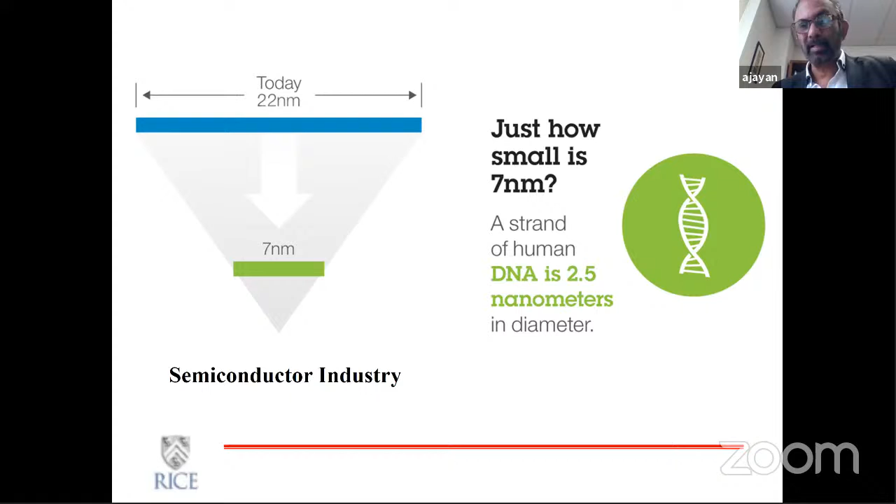That gold, which is yellow in bulk, changes colors as you go to smaller and smaller scale. So by breaking down salts which contain metals using chemicals, people were able to make nanoparticles that are really small, so that you actually get different colors, which is a result of the plasmons that exist in these materials, or electrons. And that really shows that people have been processing and doing nanotechnology for a very long time, although not really understanding how these things come about.

And scientists like us are in the process of understanding some of these things and going beyond what they could do to be able to control things at that scale. Well, before I start giving examples and so on, I still want to say a few things in background. A couple of things that are very important, especially in terms of processing and manufacturing. And this has to do with how we create material at that scale.

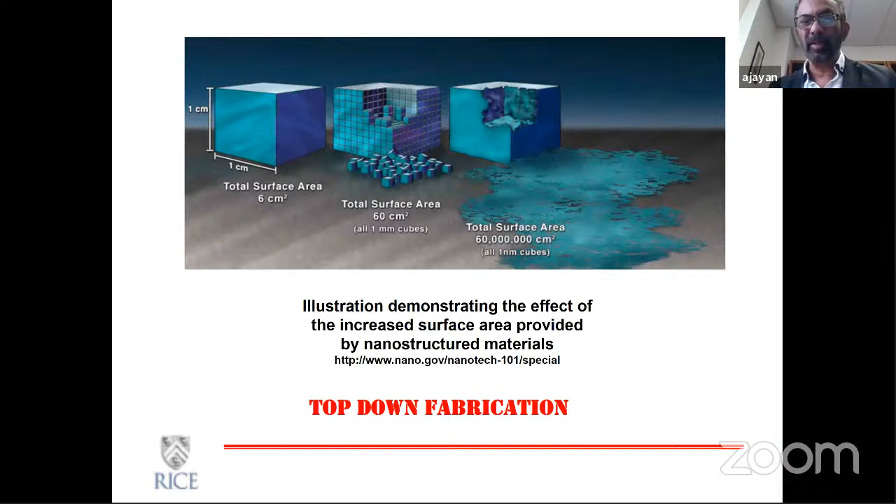Then there is the other approach, which is essentially bottom-up fabrication, which biological systems have always been part of, where you build stuff from molecules up or atoms up, and how much control you can have is a matter of what kind of tools or approaches you take doing this bottom-up manufacturing.

How do you build structures and materials with atomic precision? And how do we assemble these things together? How do you build these pathways from nanoscale to macro scale so that you can have control at every stage? These present two diverse ways of putting things together, the top-down approach and the bottom-up approach, and both are valuable. Of course, in the case of bottom-up fabrication, we are still learning the rules of the game, and hopefully there will be a stage when we will be able to build things with atomic precision.

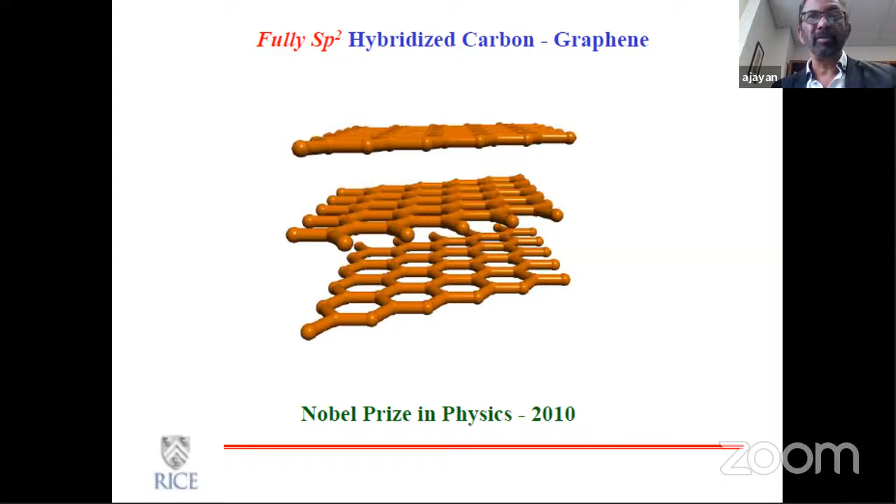And again, there are some amazing physical attributes and physics properties for these graphene-like materials, extremely high mobility for electrons in these systems, and there are many other things that are probably more detailed. But the fact that you were able to create a freestanding two-dimensional structure, just a single atom thick, and explore the properties of this was a remarkable thing. I will talk about this later on, related materials that we do.

And somewhere in between the 2-dimensional and 0-dimensional structures that I showed you, for the same carbon again, people also discovered what is called carbon nanotube. And essentially, these were just a layer of graphene that was folded into a beautiful cylinder. But the discovery was interesting because what people figured out is that by a slight twist during this folding process, one could introduce a structural chirality, or how the hexagonal arrays go around the cylinder. And this chirality had a strong effect on the electronic properties of this material.

And this was very much a surprise at that point in the early 90s, because for the first time, something like carbon, which was either an insulator, for example, in diamond, or a semi-metal in the case of a graphite material, these type of structures essentially proved that you could have semiconducting carbon. You could have metallic, highly metallic carbons and so on. So again, there are two attributes that came together. One, of course, is the structural changes that you can build into a material. And the other is the dimension.

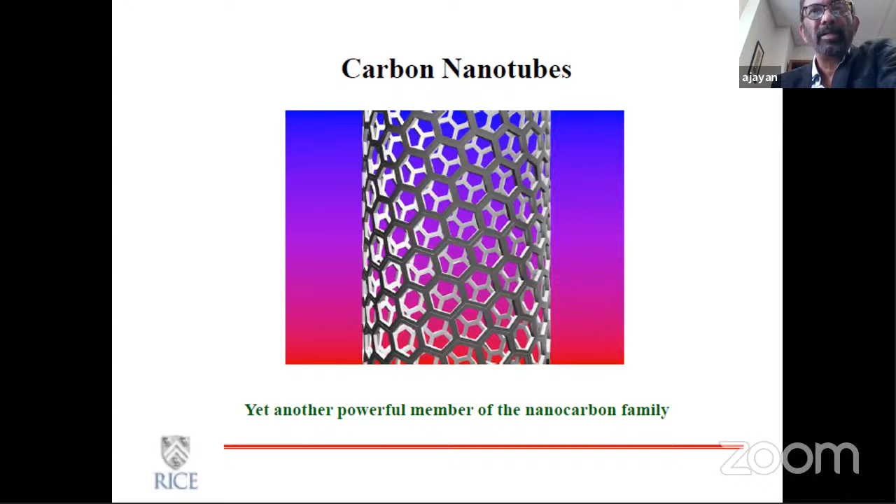So a combination of this dimensional aspect and the structural aspect allows you to make lots of materials that go beyond their traditional bulk properties. And that is why this kind of materials become so interesting. Again, as a material scientist, this is what we do. We explore properties of materials, but we also try to build new materials that have unique properties and that could be adapted to emerging technologies.

Now, carbon nanotubes are fascinating for a lot of people. And there were all kinds of fascinating ideas that were proposed. And this was one. Richard Smalley, who was a Nobel Prize winner from Rice, used to say things like, I would like to make a very long fiber with nanotubes because nanotubes are extremely strong, and go fishing with it. Or, there were people who were suggesting that you could, in fact, build a space elevator using something like nanotubes. For a good reason, because carbon-carbon bonds are extremely strong, and this is probably the only material that is viable for something as beautiful as a space elevator.

But the point I wanted to make is that there is a major challenge as you go from the fundamental properties of materials at nanoscale and how they scale as you build larger and larger structures. Typically nanotubes are a few nanometers in diameter and several hundreds of microns long, but that's not good enough for making a space elevator. You need to have miles and miles long these type of fibers. And in order to do that, you need millions and billions and trillions of nanotubes to put together into these macroscopic entities. And then the problem arises.

Then you lose properties along the way. So interface becomes a deciding factor in many of these things. And I will talk later on about these specific interfaces that are important. How do you conserve the properties as you scale or as you build things together? How do you assemble these things together?

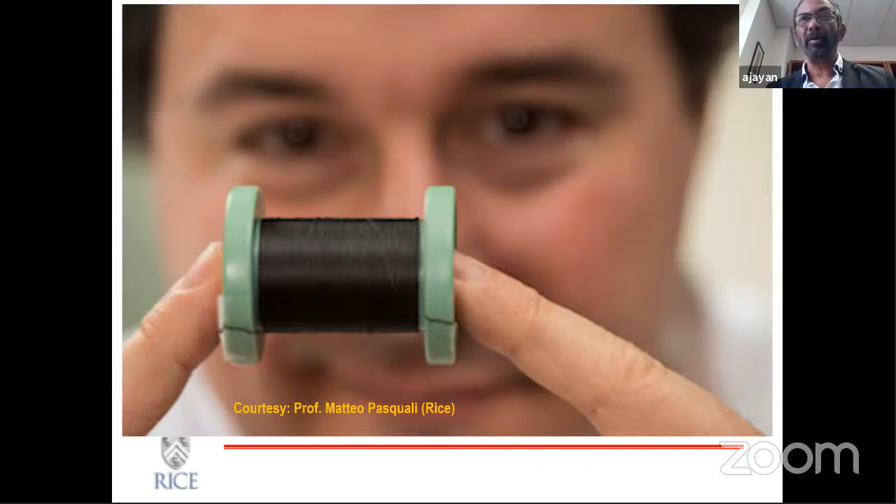Essentially, these calcium carbonate platelets in the submicron scale or nanoscale have been sandwiched between protein molecules or soft material to make this brick and mortar kind of arrangement, which makes it extremely tough. Essentially, the idea is that because there are so many of these interfaces, if you create a crack, the crack gets deflected at every one of these interfaces, and ultimately it takes an enormous amount of energy to break this. And that makes it a super tough material.

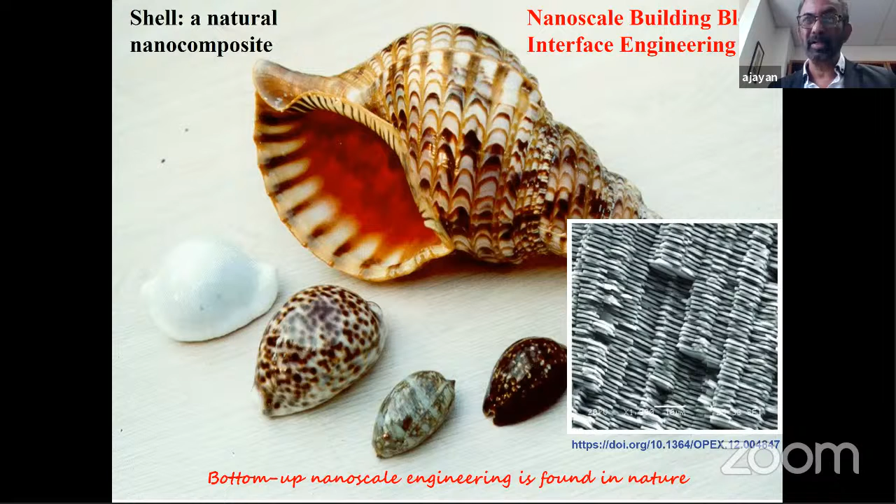So the same material that is very brittle, as in chalk, can be made into something like this with a small amount of additive and the right kind of engineering, especially at the nanoscale. So that again shows the beauty of nano engineering in all its glory. There is another thing that also plays well to nano engineering, and that's also found in nature, and that's hierarchy. When you build things from bottom up, it's much easier to introduce hierarchy.

So something like a plant, or the body of biological systems, you start with really small fibers made from glucose and other types of molecules, and you start creating these nanoscale fibers, and then to micron scale and to larger scale. So at every stage of this structural variation, you can introduce functionalities, you can introduce surface changes, which means that this hierarchy plays in very well into the overall structure that you create.

And this is only possible, or at least it's much easier to do, when you do this bottom-up fabrication compared to the top-down. And that also is the reason why the bottom-up approach is very, very valuable, because you have lots more flexibility in creating interfaces and modifying interfaces as you build these.

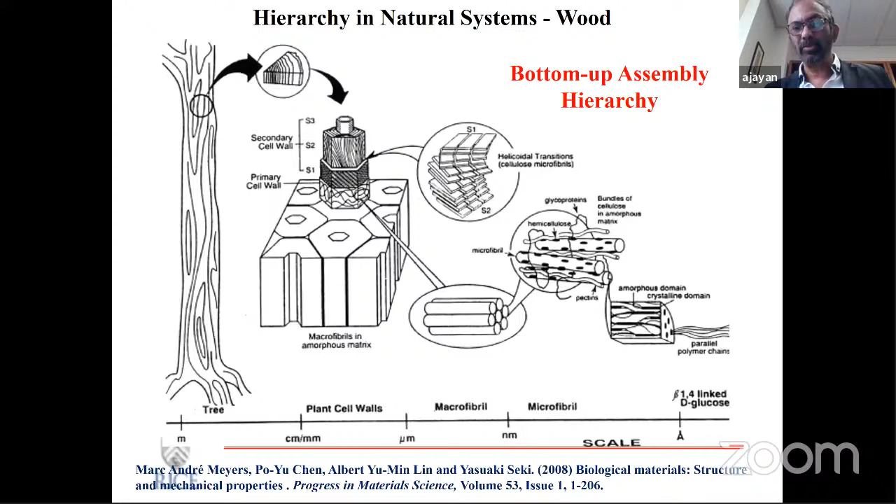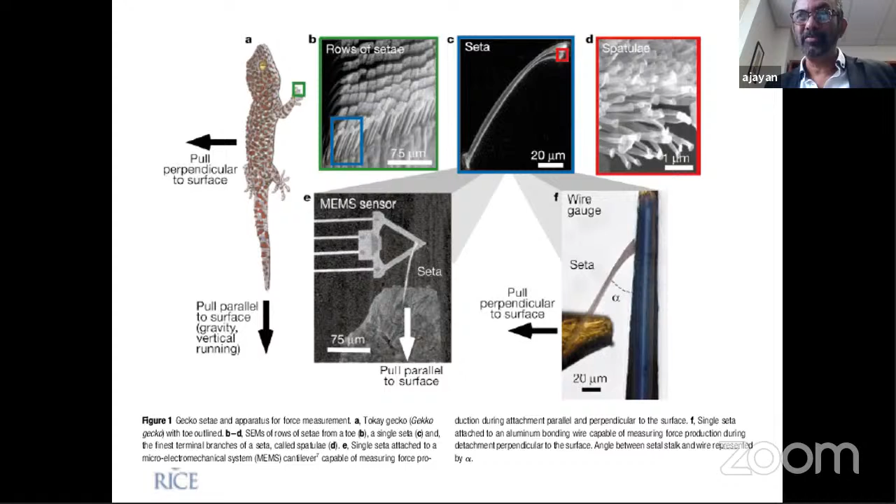So when they place their feet against the wall, there is an enormous amount of contact area because of this nanoscale size of the fibers, and that van der Waals force is enough to make them hold their own weight. And also it's nice because since it is not an irreversible sticky business, you can actually quickly change the orientation and change the contact forces so that it can actually move again. So it's a marvel of nature that it has evolved to do things like this by using nanotechnology as a tool.

So I think I have given you several examples why nanotechnology is exciting, both from the point of view of what is existing in nature and what can be done in terms of some of the applications. But let me come a little bit closer to the kind of things that we do in our lab. We make nanostructures, we assemble them in order to create certain structures. And what are the challenges and opportunities in this? So one of the major points here is, how do you assemble this humongous number of nanostructures to make something useful, or to at least create well-defined structures.

It's a little bit like playing this Lego game. And many of us have already done this, and you know, the smaller the pieces are, the more complicated it gets, right? But of course, the smaller the pieces are, the more flexible you are. So nanotechnology is, again, basically a Lego game, but with pieces that you cannot really see.

So you need to either use a magnifying glass in the sense of a large microscope, or you need to figure out some boundary conditions that would allow things to assemble by themselves. We call it self-assembly, or sometimes directed assembly. So you create environments where these structures or these pieces can assemble without you having to put them one by one. So that's the tricky part.

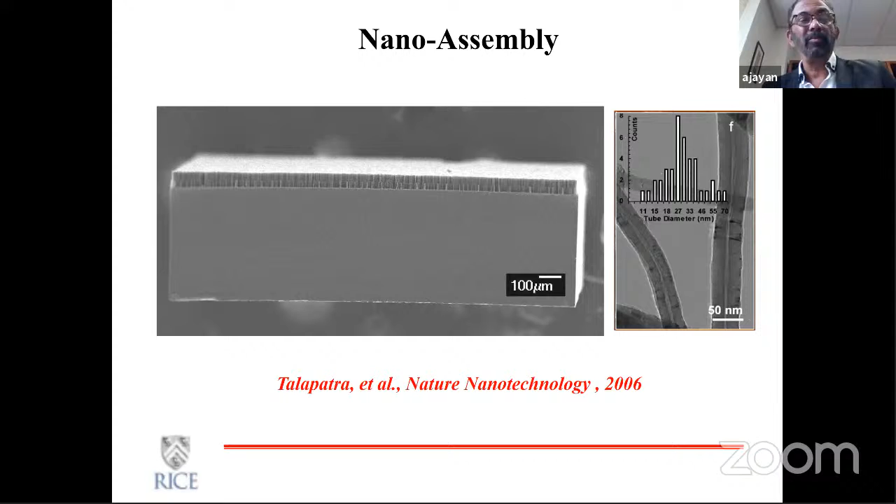And here is an example where many years ago, we were able to assemble carbon nanotubes in these vertically aligned arrays, a large number of them, by essentially preparing a substrate with the right kind of catalyst and using it to deposit the nanotubes. Of course, these are not as perfectly aligned as one would like, but there is a significant amount of alignment that allows you to call it vertically aligned. And what could one do with something like this?

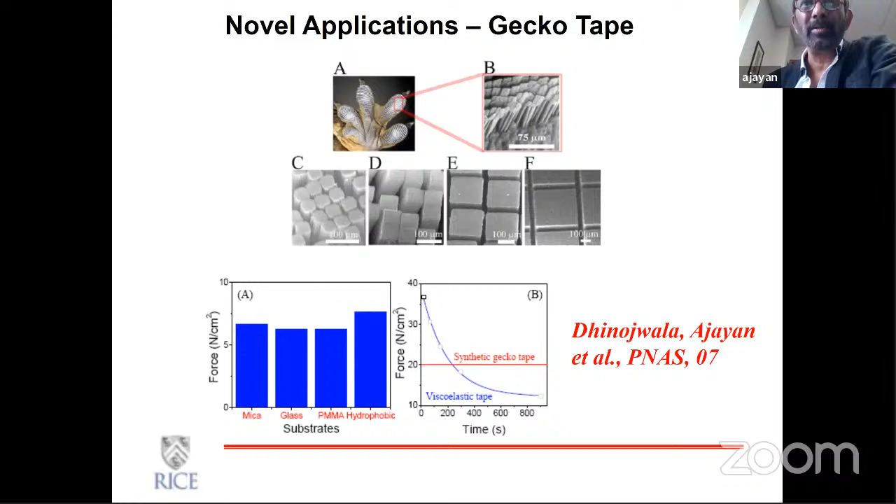So again, coming back to this gecko, we were able to create, using these aligned nanotube structures, strongly adhesive surfaces. In fact, artificial gecko surfaces. And we were able to show that, by engineering the right density of these nanotubes and the right patterns that you can create by post-processing or post-growth, we could mimic the gecko and build very interesting artificial adhesive tapes. So that's an interesting example of why one would want to engineer nanostructures in a particular order.

Here is another. We were also able to show that, again by engineering the density of these nanotubes, we could create a surface that has an enormous amount of light absorption. In fact, we were in the Guinness Book of World Records for showing that a layer of nanotubes would absorb more light than any other structure that has ever been made.

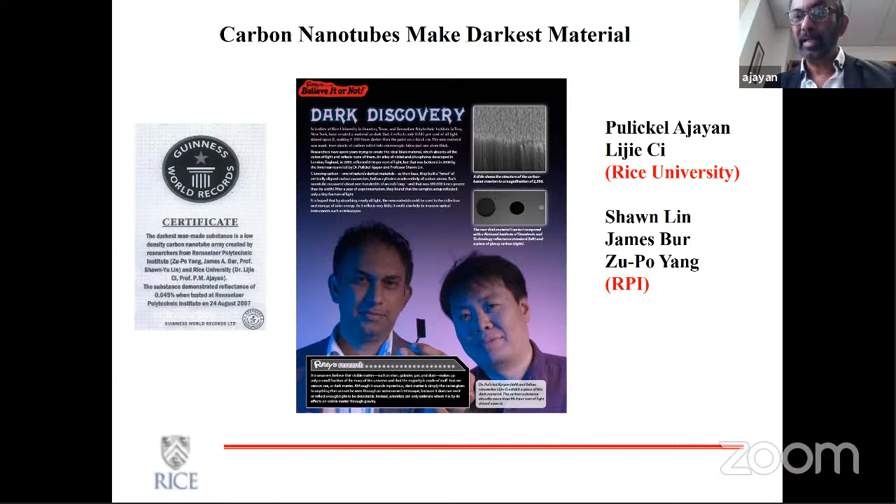So again, you can see we were also in things like Believe It or Not, which helps young people to be attracted to science. We could, in fact, by designing nanomaterials, build these types of interesting structures that have both practical value and excitement value, motivational value. But if you go further and think about creating all these structures in three dimensions using the nanoscale as the building block, then you start to see what kind of challenges you face.

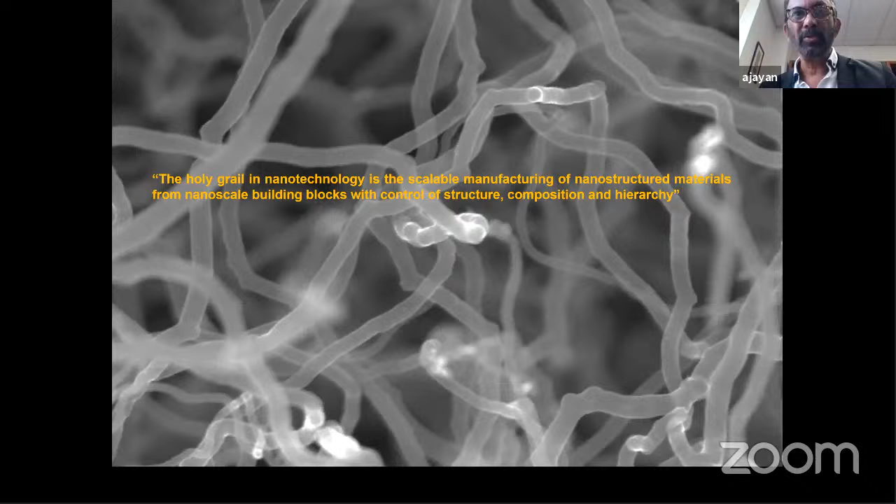In fact, I think the holy grail in nanotechnology is the scalable manufacturing of nanomaterials from building blocks that are nanoscale, with control of structure, composition, and hierarchy. And even though we can say that this can be done bottom up, there is no real scalable way to make this happen. For example, instead of the simply aligned van der Waals kind of structures that I showed you before, we want to build something like this at the nanoscale. Can you actually do this? The answer right now is no.

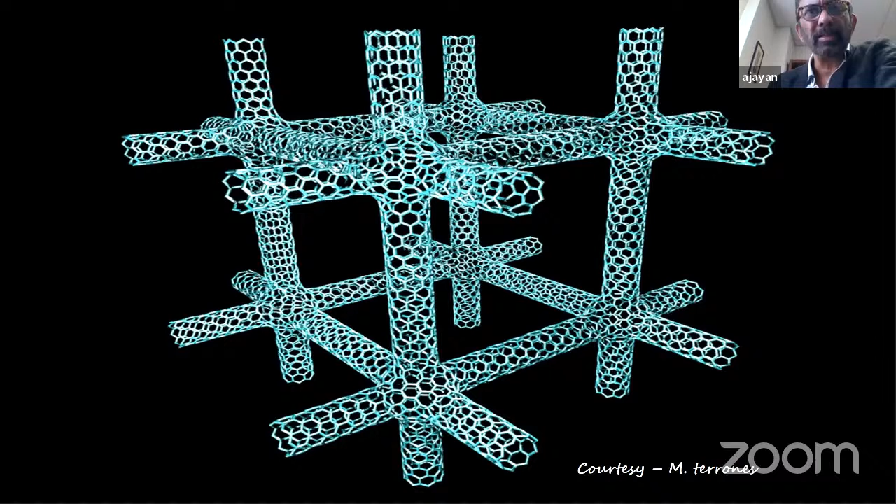First of all, making junctions between nanotubes is really a problem, because you have to break bonds and build bonds again. And secondly, how do you really make these types of architectures with periodicity at the nanoscale? There isn't any such method today.

And if you are able to do this, here is a theoretical prediction of certain types of carbon-based structures that would look very different, and would also be enormously useful. We talked quite a bit about carbon in different modalities, but if you could build these types of purely carbon architectures, you can make carbon that is magnetic, carbon that is extremely conducting, carbon that is insulating, in some sense.

So I think the question is really, it's already known from theory that certain types of structures would give you certain properties, but today's technology doesn't really allow you to make these structures at the scale. And again, dimensions are important. You can make these at a larger scale, and I'll show you one example of that. But to make this at the scale and with the structure that you require is still a major challenge. But this is where the future is going.

How do we make these types of architectures? Now, as I said, at a larger scale, we can easily do this.

The same structure, if you are not worried about the scale, we can print these. 3D printing or additive manufacturing has become very popular today. And we have been able to print all those geometries that you saw in the previous slide with different materials. And of course, these structures are also interesting in terms of stress transfer, or gas transport and so on. But of course, it is still not at that scale where the fundamental properties will change.

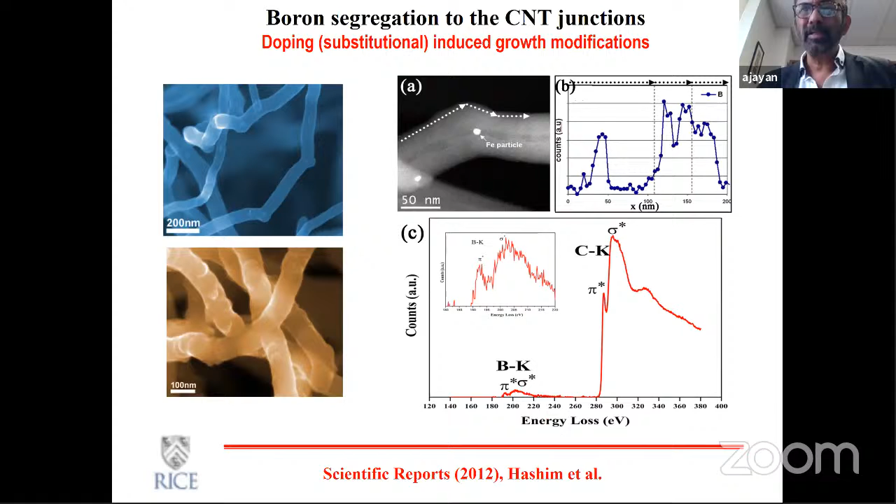People have done work in order to make these 3-dimensional interconnected architectures, but not with the periodicity that you saw. So by using certain catalytic techniques, you can actually weld 2 nanotubes together, you can create junctions, and you can create 3-dimensional structures. For example, this sheet of carbon that we made in our lab is all interconnected nanotubes, but with no periodicity, because that is difficult to control.

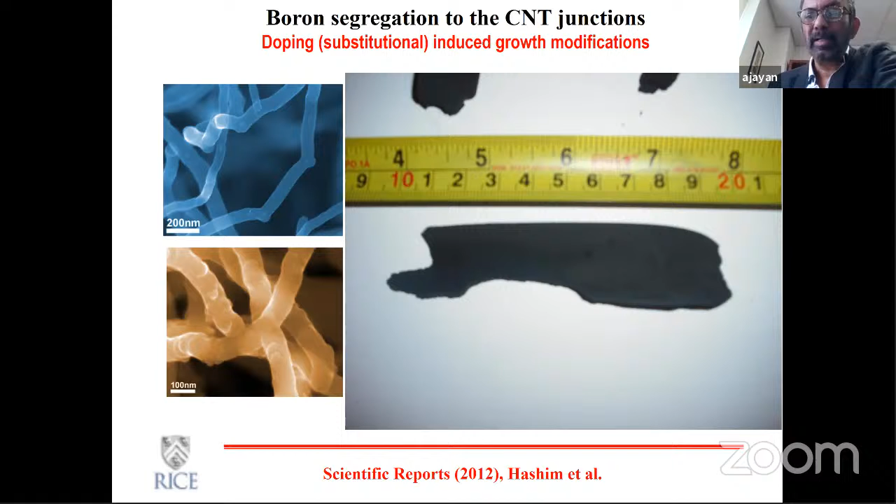And these are, again, very porous membranes that are very strong because they're interconnected nanotubes. They're used, for example, as electrodes in energy storage, batteries. You can use them for membranes, for filtration. So I think there is a lot of activity today in trying to create nano-structured materials or nano-engineered materials, which could be useful. But again, in order to reach the kind of clear periodicity and control of structure, that is still quite a challenge.

Of course, we also do a lot of work at the very nanoscale. It's one thing to make a large solid structure with a lot of interconnections, because it's hard to say how these materials would behave. So one has to go and look at these individual junctions using techniques that people have developed in their labs. For example, you can look at a nanoscale junction in situ in a microscope and look at the structure as well as the change of behavior. When you load it, how does it change? You can actually create a stress strain curve within that junction.

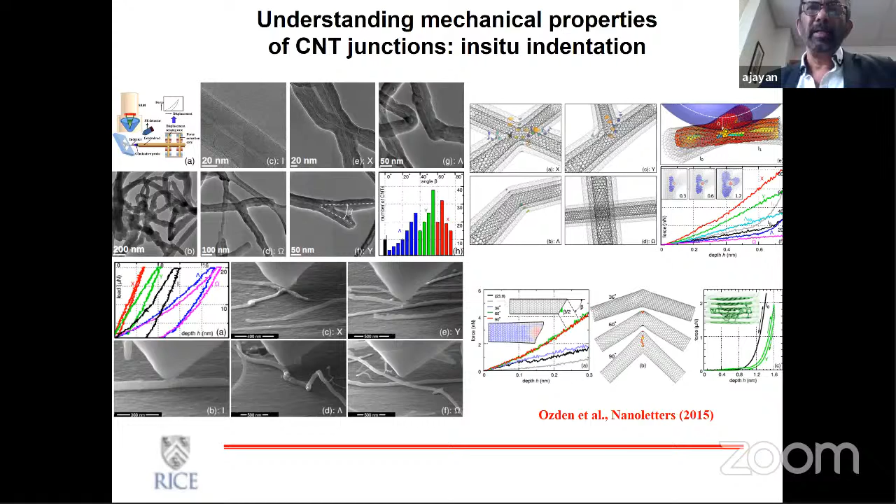So there's a lot of work being done in developing tools that allow you to do nanoscale observation or experiments at the nanoscale. And that is as important as the things that we do in terms of creating materials. And once you have some understanding, you can use the theoretical predictions to broadly predict how these kinds of materials will behave. And it's important because you need that data.

And today, theory has broadened into other areas like artificial intelligence, machine learning. So all these things come into play when we are trying to understand a complex structure and look at nanoscale properties and how that translates into macro scale properties. Here is an example, a very similar structure, a three-dimensional scaffold made from interconnected graphene instead of nanotubes. And I just wanted to show this because it shows an enormous amount of flexibility.

Not only that, this elastic nature of this kind of structure holds all the way from cryogenic temperatures close to liquid helium temperatures. Actually, that's remarkable, something showing elasticity at that temperature, all the way to 1,000 degrees or so. So if you can engineer structures with nanoscale elements, which have specific, fascinating properties, and build larger structures which could be useful in practical applications, then you can extract these significantly improved properties.

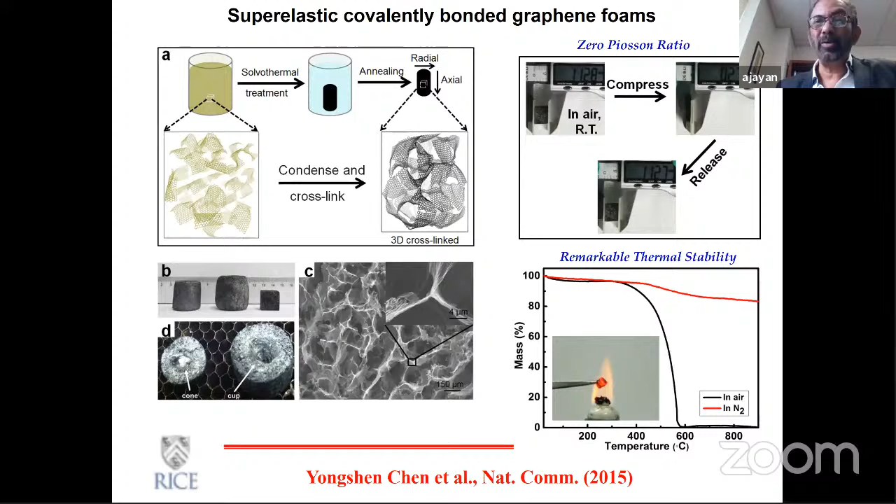I don't think there's any material that shows this kind of thermoelasticity range. So that, again, shows how we work from the nanoscale and go all the way to making structures.

Let me talk a little bit about interfaces. I don't have too much time, so I will go quickly on some of these ideas. One of the things that you saw in an early slide is that as you break it down to smaller and smaller pieces, the volume of the interface increases dramatically. And that is a plus, and that could also be a minus. It could be challenging because sometimes processing becomes very difficult. The same amount of material, if it is in the micro scale, you can easily disperse it in a matrix, but when it is in the nanoscale, it becomes enormously difficult because of the large surface area and hence increase in viscosity.

So interfaces are important, right? Interfaces can also be an advantage because, as I said, you can build hierarchy in a much better way. You create surface functionalities, you can modify surfaces at every level. And as you have more and more interfaces, you can introduce the value added by these interfaces. Just like the abalone shell that I showed you. It is only the interfaces that are allowing you to make a material that is much tougher.

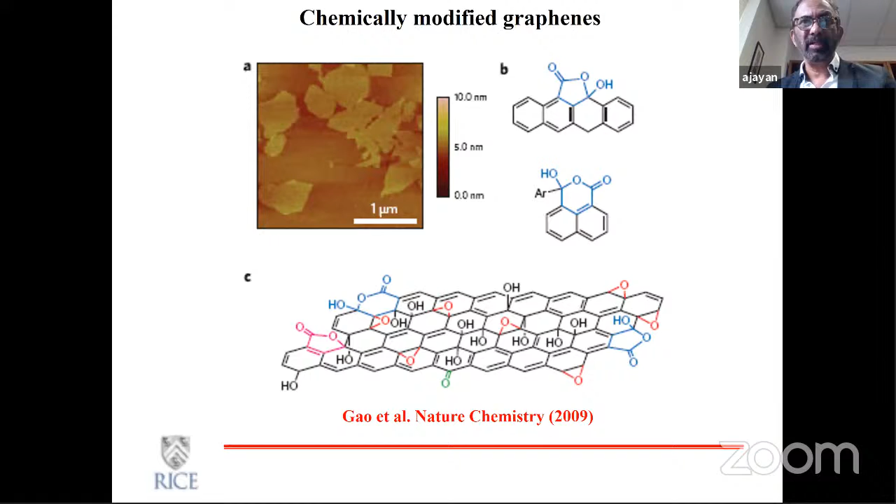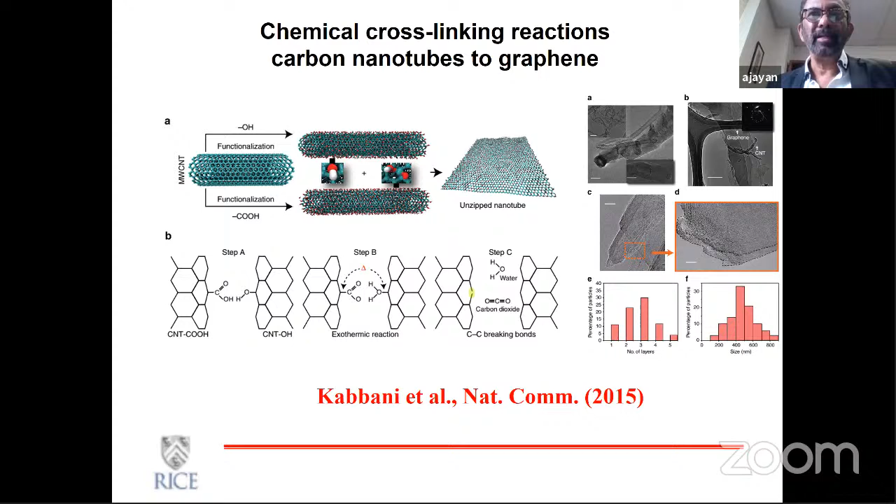So playing around with the interfaces, designing the chemistry of the interfaces, modifying the chemistry are all exciting parts of this whole nano engineering. Again, there can be many interesting examples where chemically functionalized nanomaterials can be put together in different ways through cross-linking and so on that makes materials stronger, materials more interesting, and designing the actual final product. And nanotubes is not the only example. There are many, many examples that have tried to build larger structures from individual building blocks.

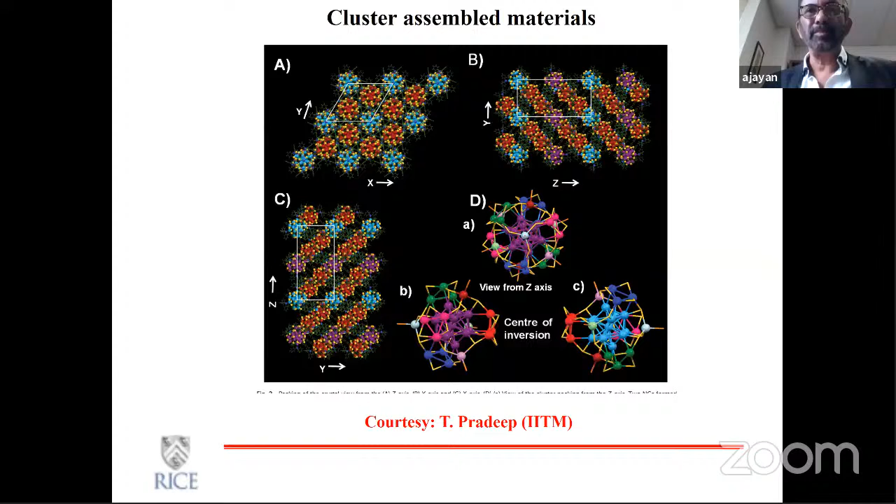This is a great example of clusters that have been put together using these chemistries at the interface. So today you can build this really macro scale cluster assembled material with really atomic precision. These clusters can be very, very precise. And when you put them together, you have enormous flexibility by changing the interfaces to change its electronic properties, change its optical properties. So there's a lot of material science that is being done to create these fascinating architectures.

In addition to that, you could also think about changing the interface to your advantage. So if you are thinking about a polymer composite where nanomaterials are added to the polymer, by changing this interface through chemistry, you can either make it very strong or you can make it very weak. And both have, again, advantages. Obviously in a structural composite, you want it to be very strong. So you use the right kind of chemistry. And again, I want to emphasize the reason why this works very well at the nanoscale is that you have an enormous amount of interfaces, and the impact becomes much, much larger.

I will give you one example of a strong interface and one example of a weak interface. The example of a strong interface is the structural composite that I mentioned. You want to have load transfer, which means that you have a very good interface. But if you don't have a very good interface, you can also use this to your advantage. So this experiment shows that when you apply load to this weak interface material, there is a lot of sliding, there's a lot of dynamics going on at that interface. That allows you to absorb energy when you're loading.

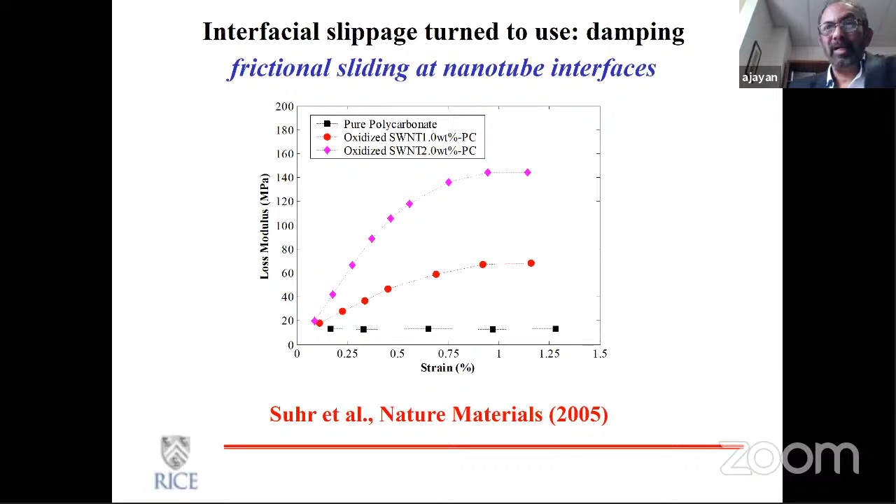So this type of composite can be useful in cases where you need vibrational damping. Again, you damp vibration by absorbing energy into the structure. So this type of weak interface material could be perfect for that. So again, by engineering the interface between nanoscale objects and the matrix, you can play around with what kind of application you target.

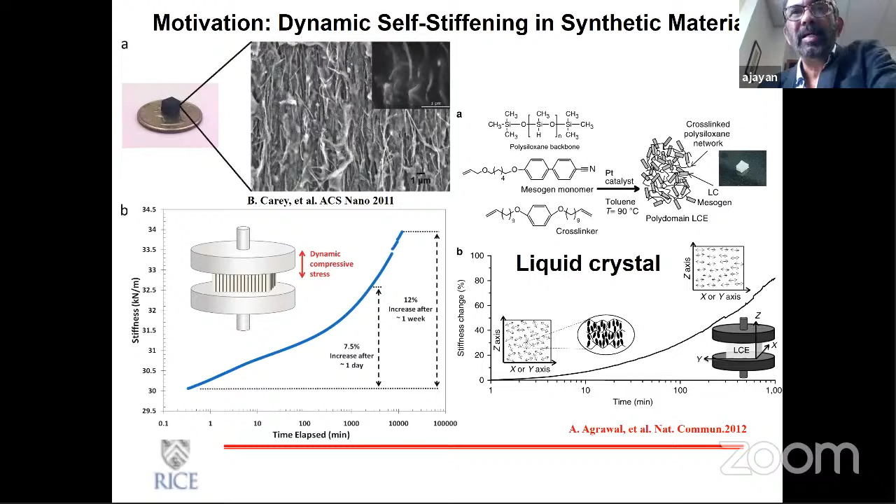And here is an extreme example of that, where we were able to engineer the interface in such a way that as you load the material, it actually starts to strengthen because the interface starts to evolve in a certain direction. So you can think about making self-stiffening material, which is fascinating. In fact, many of the structures that you have in our body, like bone, are self-stiffening. That's probably due to some biological additions, and it's a living material like your bone. So that is slightly different, but you can think about synthetic materials that are self-stiffening, self-healing. There are all kinds of fascinating attributes you can give by designing and engineering materials.

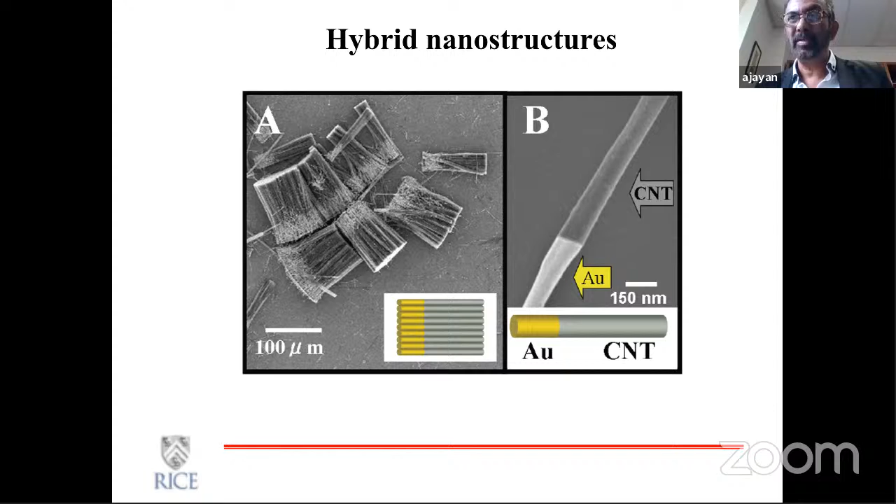Now, the building blocks themselves can be quite complicated. I mentioned clusters or nanotubes, but you can also have bifunctional or multifunctional nanostructures that contain multiple components. So here is an example of a gold-nanotube. And the reason why I'm showing you this is that this is a very, very nice nanowire, because on one side you have gold, which is hydrophilic, and on the other hand you have a nanotube that is hydrophobic.

So what I'm trying to say is this idea of reconfigurable assembly might play very well in cases like drug delivery. For example, let's say you create a capsule with multi-component nanostructures. You embed a drug and you target a particular area, and then you essentially deconfigure or break up the assembly by some external means so that you can deliver the drug.

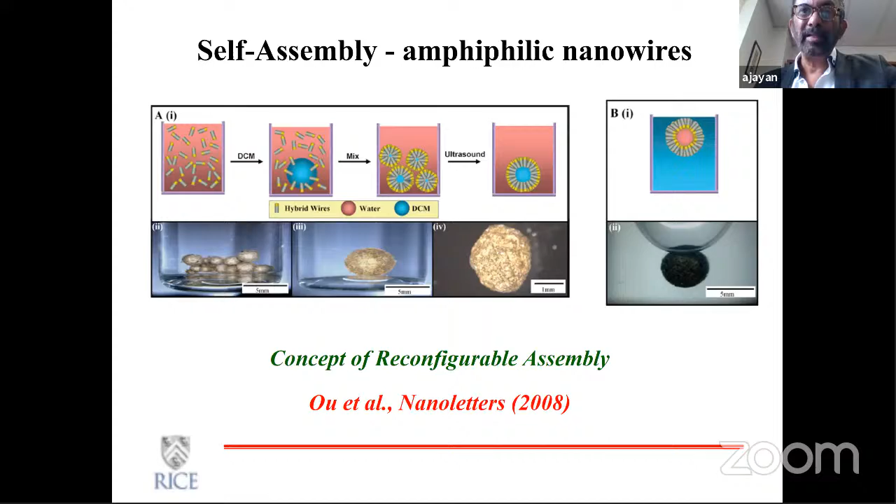So there's a lot of active components that one might be able to create using nanoengineering, and that's quite fascinating. The other possibility is to create nano devices. Of course, electronic devices are very common. But people have now started to build devices like a battery or solar cell at the nanoscale. And of course, all these things need the right combination of materials and the right kind of engineering at the nanoscale.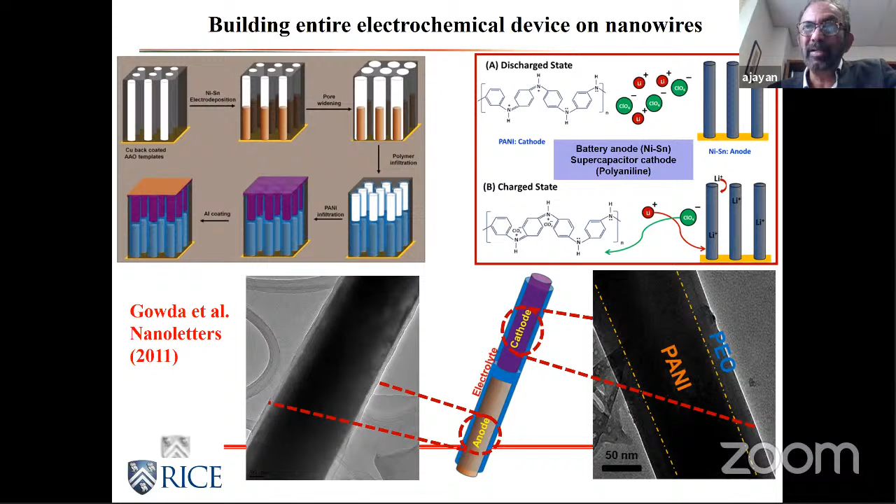So here is an example where you have the anode, the cathode, the electrolyte, all these components that are important for a battery, all engineered into a nanospace. And they work very well as an energy storage device. And again, we work quite a bit on batteries and supercapacitors and things like that, which is useful for energy. And our goal is not just to make better in terms of energy that you can contain, but also different forms of energy storage devices.

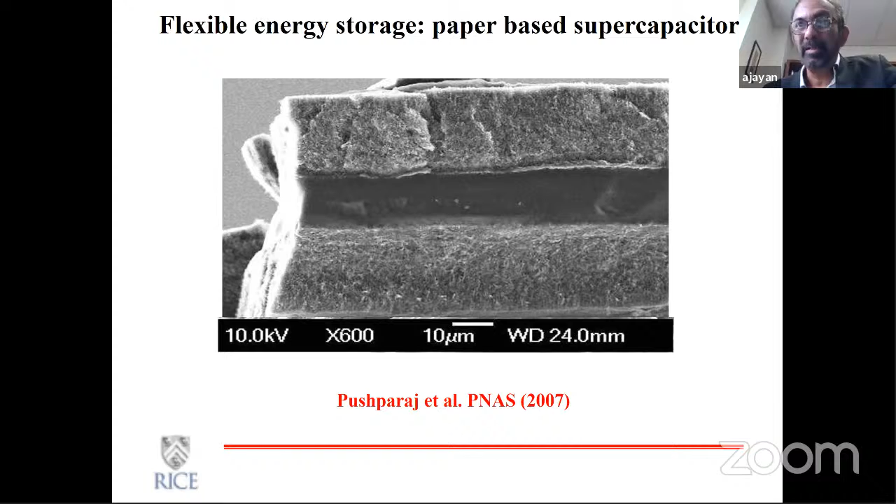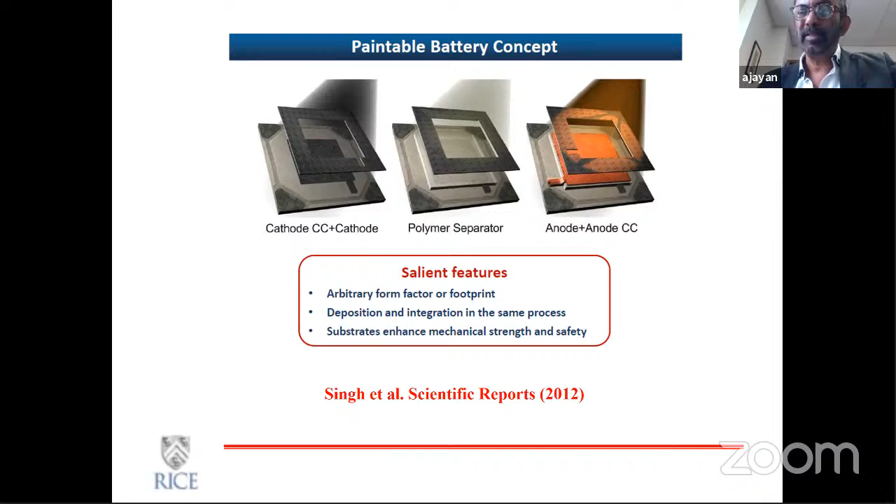So we make flexible batteries that can be wrapped around a structure. Or we are interested in making things like paintable batteries, a battery that you can paint anywhere, right? So utilization of these type of materials allows you much more flexibility in building these type of devices that have much broader applicability compared to the typical devices that you see. So those are exciting things as well.

And one more topic that I will cover quickly is the fact that you can go to the limits. And again, that is what nanotechnology is all about, going to the limits. So, I already mentioned single atom thick material like graphene. And again, Richard Feynman is quoted widely for pretty much everything. And here is one example where he was fascinated by these layered materials and the fact that if you can pick up these layers one by one, then you can combinatorially build very different types of materials.

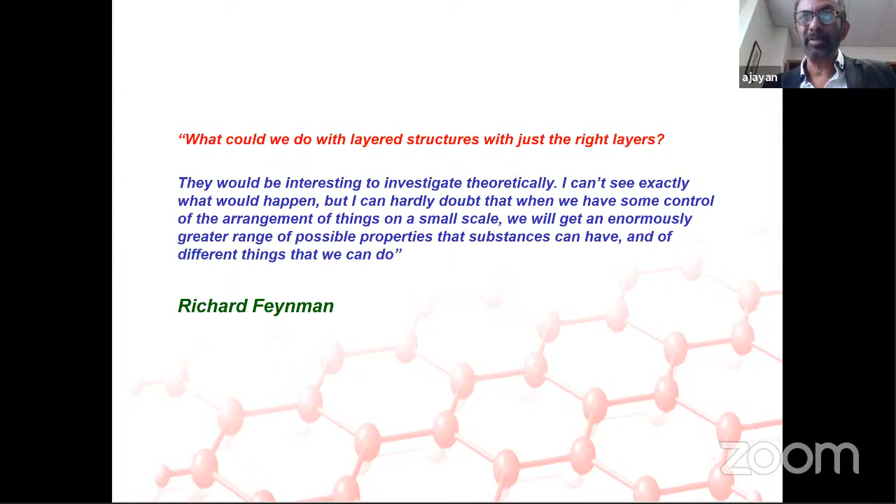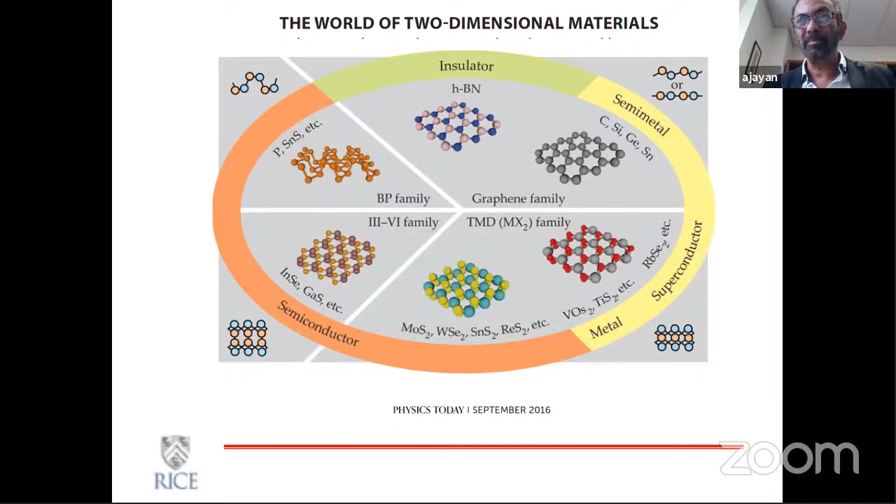And again, this is a basic concept from a materials point of view. If you can make these building blocks or extract these building blocks, then you can put them together in various ways to make fascinating new materials. So here is a picture from Physics Today, showing that if you can actually extract individual layers, you can do this Lego game and build up various fascinating structures. There are many, many materials that allow you to do that, all the way from metallic to semiconducting to insulating.

And again, this is too crowded. Don't worry about the contents, but at the end of the day, many of these things we do have to be utilized. And that is precisely the reason why we do many of these things. So, semiconductors, I mentioned many times. Here is an example of a very fascinating type of device. We call it the tunnel FET, which is possible because you have materials like this, because the traditional silicon materials would not create the right kind of devices because of some fundamental thermodynamic reasons.

Electrostatics, there are many reasons why when you scale down things may not work very well. But using these type of new materials, for example, the reason why something like graphene is interesting is because there are no broken bonds in that single layer, right? Whereas silicon, if you make it very thin, you will have so many broken bonds, and that will interfere with some of these device characteristics.

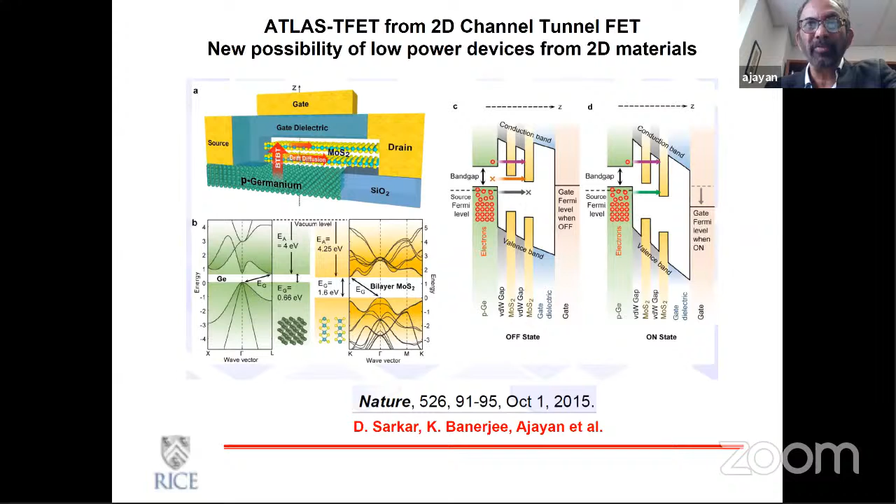So I think there is also, I didn't emphasize it too much because we're mostly looking at the materials aspect, there are also devices and other things that would very much benefit from development of these type of unique nanostructures. And again, as Feynman said, what material scientists like us are interested in is to put these things together in various ways to make new types of materials. So I can take graphene and I can take another material that is very similar, extract these layers and put them one after the other, in a periodic manner.

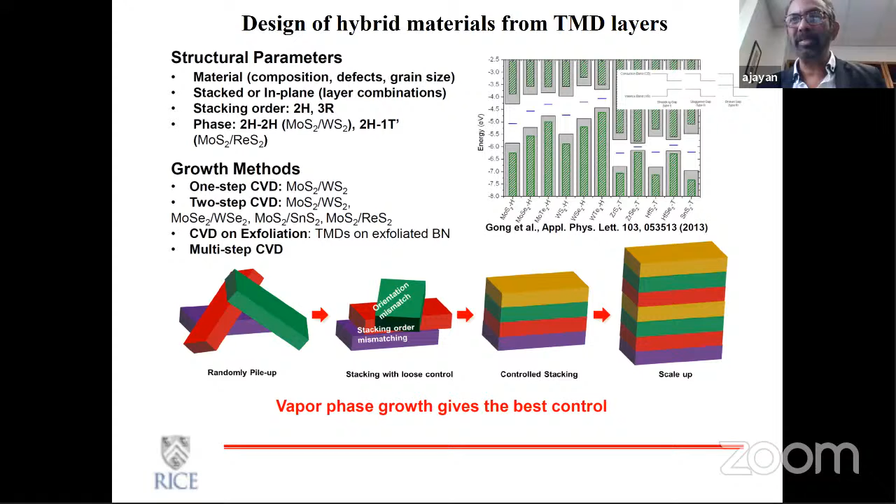And that would be an entirely different type of layered material. So again, this is the same Lego thing that I mentioned. How do you have n number of pieces, and then how do you really put these things together? And again, you have to do a lot of characterization to understand these kinds of stacking.

We can also do engineering in this individual layer to make structures and an entire device within these. And again, imagine today we are able to actually make an entire full device, a fully functional device, by engineering a single atom thick material. Same thing, the semiconductor industry is looking at 7 nanometer devices. And there are billions of these devices in the chip that you get for your cell phone or for your computer. So it's all about how do you essentially engineer these structures together, whether it is top down or bottom up. It's a fascinating long-term perspective.

How far can you go? Can you go to the molecular scale? If you go, are there tools available where you can play around with things much less than 7 nanometers in top down? Or do you need a bottom up approach to it?

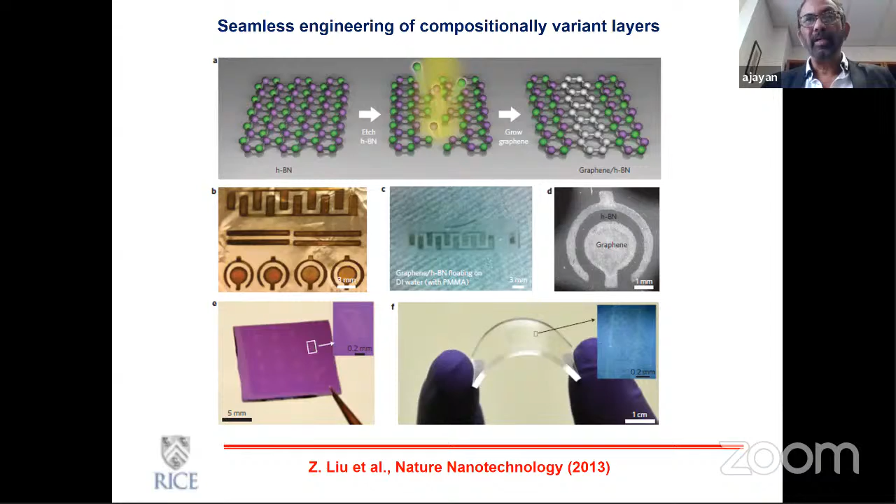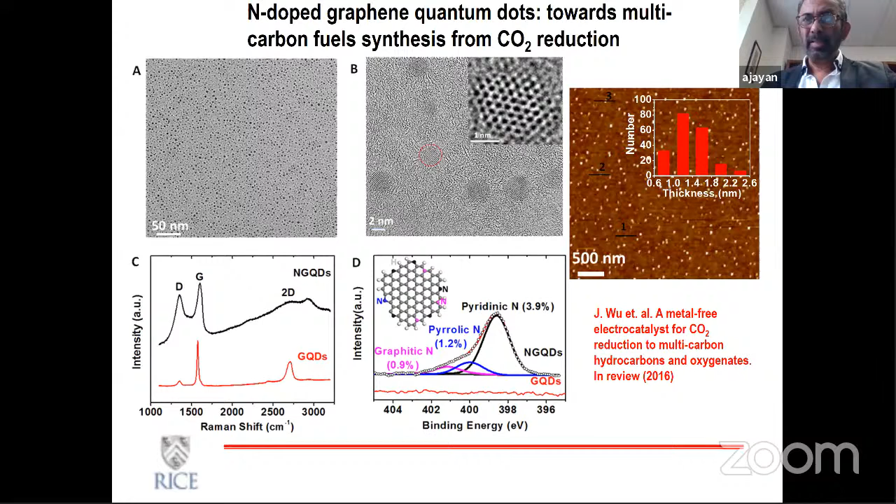And some of these materials can also be converted into other types of forms like quantum dots. I'm going to skip some of these, but what I want to say is that some of these quantum dots have been used for very important reactions, things like carbon dioxide reduction. Carbon dioxide is going to be a major thing. I'm sure that it's talked about in Europe and other places. It's going to affect our future environment. So nanotechnology is also being looked at in designing catalysts, designing new types of absorption materials, both for capture as well as conversion into useful fuels.

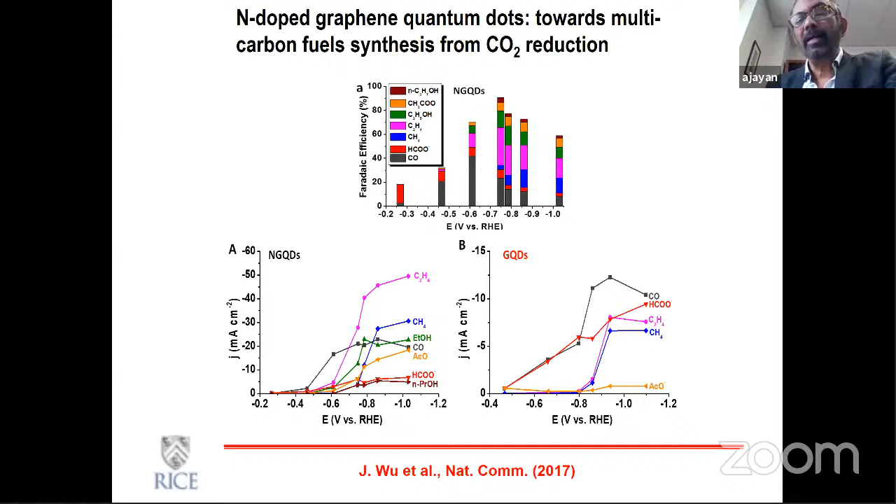So again, it's a broad field, and this is actually taken from an NSF survey that says that we have kind of ended the second phase of this nano revolution. We have been able to make a lot of these materials. We have been able to design and engineer some of these structures, both from top-down and bottom-up approaches.

And you're going to see probably a technology divergence where many of these things start to get integrated in the next phase. I don't know, 2030 is the end date, but essentially you're going to see more and more integration of nanomaterials into many technologies that will be very valuable for us, whether it is energy storage, energy conversion, semiconductor electronics, or nanoelectronics, membranes, water desalination. I mean, there are all kinds of technologies that allow the implementation of nanomaterials.

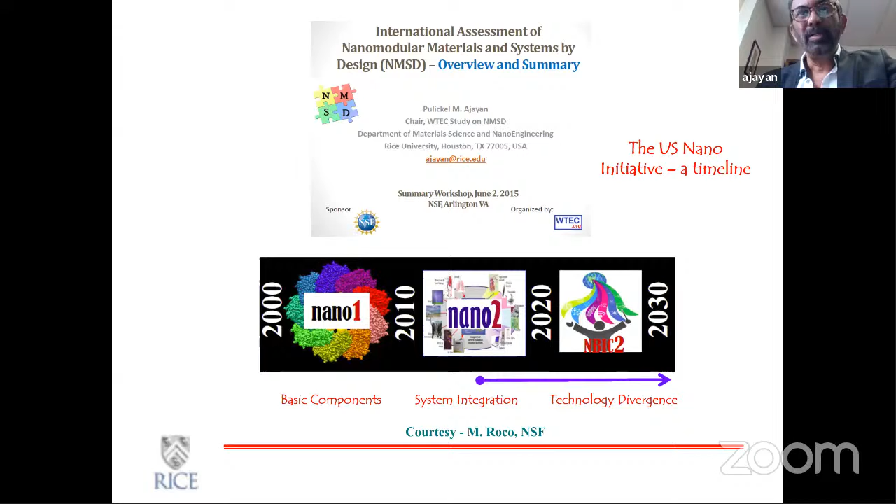And I would say we are still in early stages in really atom precise engineering, but I would certainly say that we have understood a lot in the last 2 decades about how certain materials work at the nanoscale and how you can assemble these things.

And of course, the future is going to be an intelligent, responsive kind of environment, with sensors embedded everywhere, and obviously these are nano. I mean, we have already seen the effect of the pandemic, right? If you can have sensors all over the place, real-time monitoring of all these issues, that would solve a lot of our problems. And healthcare is a major area where nanotechnology is being pursued, both in drug delivery as well as biosensing and so on. So I think we are going to see a world full of responsive components and elements, and many of those things will be enabled by nanotechnology.

And let me kind of finish. I thought I'll pick a quote from Cervantes because that is probably relevant here.

And science is like anything else. I think it has to be diffused into the public domain. We all have to be prepared, and only then we understand the importance and relevance of science. And to be prepared is half the victory, really. Whether it is scientists or non-scientists, I think technology and science has contributed immensely to our well-being and our society. And I think it's very important for us to be at least aware of what is happening and what it is for us in the future.

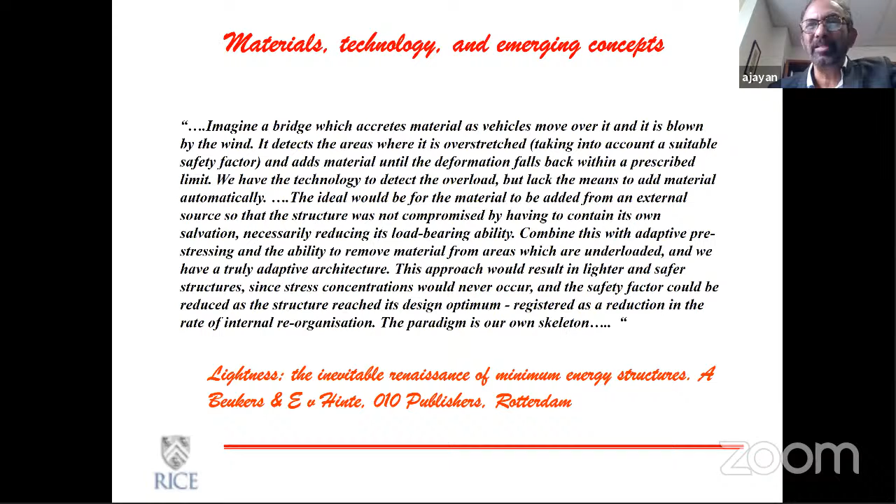Thank you very much. I hope it was broad enough for a large section of the audience. And nanotechnology is, again, a big field, and you can keep talking. But I think what I wanted to mention is the materials aspect of things. What are the challenges and opportunities that the future generation has for materials in terms of nanotechnology? Thank you.

Ramon, you can hear me, right? Yes, I can hear you. So should I stop share? Yeah, we can start like that.

No problem. Okay. Well, first of all, I would like to thank you, Ajayan, for your kindness in agreeing to participate in this talk for all audiences. As an introduction, I met Ajayan for the first time in Colombia when the organizers of the meeting, Expo Engineering, very kindly invited us to give a conference. And the truth is that when you have to give a conference next to someone like Ajayan, with tremendous scientific impact numbers only achievable by very few researchers, you feel some pressure.